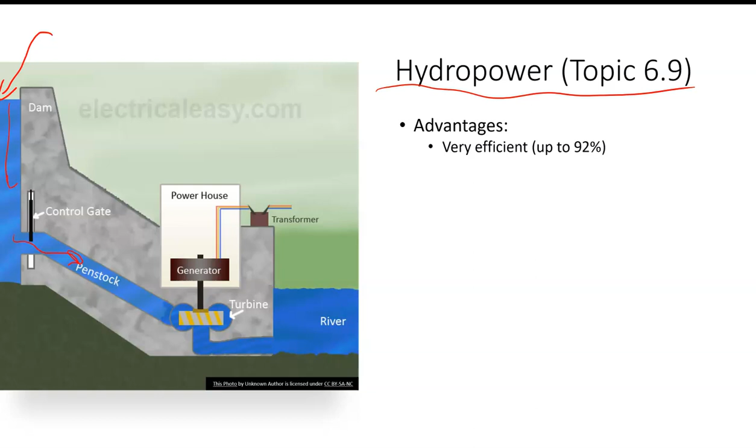Now, we also have that 24/7 capacity. So unlike solar and wind, which are intermittent sources, hydropower can be used at any time of day, regardless of the weather. Now, it is, of course, somewhat limited by the water cycle. So that reservoir has to remain full, and the only way that happens is for water to return upstream. Now, there is essentially no air pollution or CO2 emissions from the process that creates electricity. Of course, concrete emits CO2; the production, the construction, all those things do have carbon footprints associated with them, but the actual water turbine generator does not produce any air pollution or CO2.

And also, unlike maybe a nuclear plant or a thermal plant, which takes upwards of 20 to 30 minutes to get hot enough to produce electricity, dams are almost instantaneous. So you can kind of think of it as a giant low-tech battery, there when you need it.

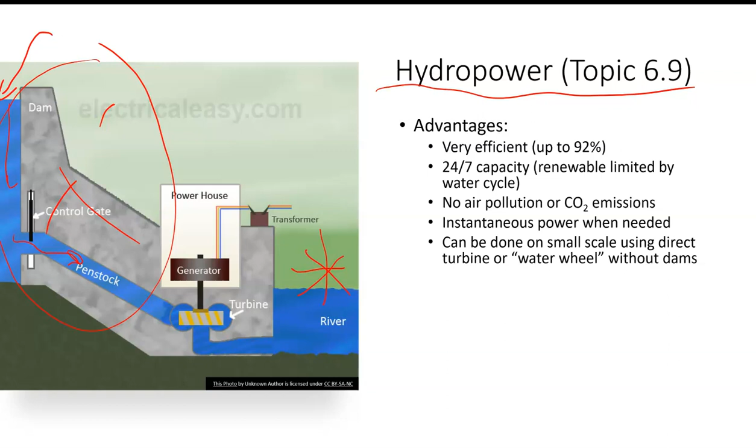And we don't really do this frequently yet, but we can also do hydropower in small scale. So maybe we don't construct a giant dam, and all we do is we take moving water, in this old water wheel concept, that has enough energy to generate electricity. Or maybe you just bypass the river and move water through sort of an artificial channel for electricity. There's all kinds of other ideas for smaller scale. Now that would not produce nearly as much power per generator as a giant dam would, but this can be done without having some of these disadvantages.

The primary disadvantage being, of course, that it's expensive to build dams, and probably the single biggest controversy around dams is the fact that they have a major disruption on the river habitat. Makes it really difficult for migrating fish, for example, to do their thing, so that it impacts their population. So there are some disadvantages that are not air pollution or climate change related that make dams really unpopular in certain parts of the world. And of course, areas that don't have rivers can't use hydropower in this sense.

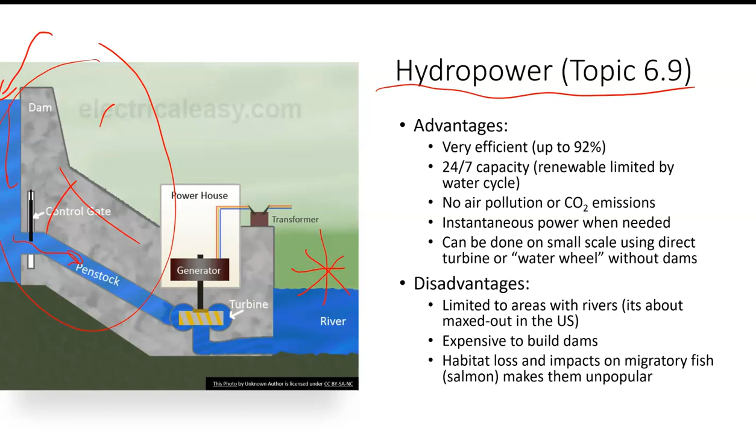Now, moving on, we can look at tides, right? So hydropower is just simply the idea of using water to power things, right? So tides are very reliable, right? There's a predictable cycle of water moving in, water moving out based on the gravitational pull from both the sun and the moon, right? Very predictable.

And so there's all kinds of ideas out there for taking this predictable pattern in our oceans and inlets and sounds and stuff like that, and using that moving water with the tides to spin turbines. So you can almost think of them as an underwater wind turbine concept, but rather than wind blowing the turbine, it's water. There's several different concepts out there.

One of them involves using waves. So basically, you have a buoy type structure anchored to the ocean floor, right? The ongoing up and down of waves could theoretically spin or move an object within a generator to create an electrical field, right? So these are out there. They actually do work. The prototypes do produce electricity.

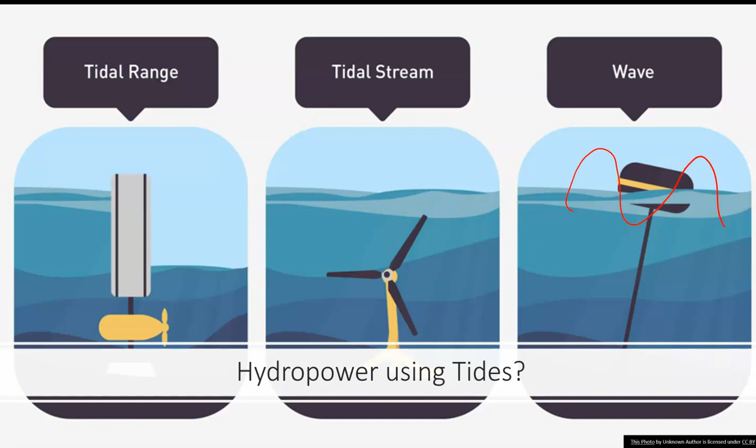But again, ocean water can be corrosive. How does this impact underwater habitats and so on? Those are ongoing studies. This probably will be something that scales up eventually, but it is something we can use hydropower for. All right, next topic,

6.10, geothermal energy. As the name implies, geo being earth, thermal being heat. We're going to take heat from within the earth and access that heat to generate things like electricity or heat water in homes. So basic idea, you have underground water, right? So we have superheated water that's in close contact to some sort of geothermal heat source, maybe a magma plume or something like that, right? We can drill into that super hot water.

Now, hot water is pumped to the surface. Now, that water is under intense pressure under the surface. And so it's actually much, much hotter than just boiling water like we would have at the surface. So as that superheated water works its way to the surface, that pressure is relieved and it just creates steam, right? So then here we have our very familiar high pressure steam turbine system, all right?

So the difference here is rather than at the surface burning coal or natural gas, or using a nuclear reactor to boil water to create steam and spin the steam turbine, we're taking already heated water that's been heated by the interior of the earth, right? And once that reaches the surface and that pressure is relieved, that turns into steam. That steam spins the turbine, generator, and off we go, right?

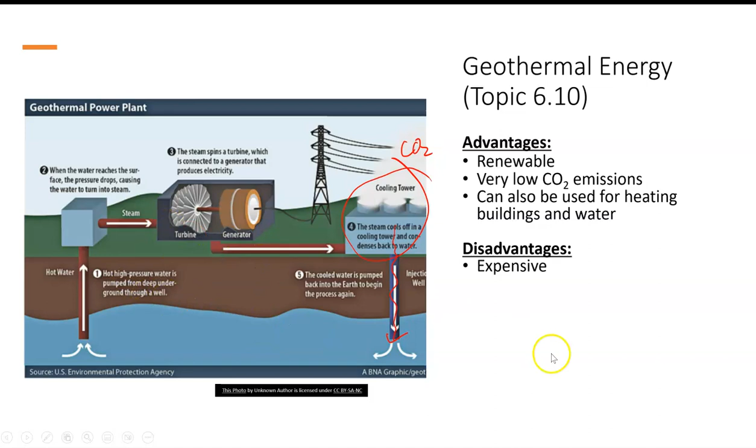All right. Now, disadvantages, it's expensive, right? We're digging deep underground. And sometimes the steam is a little corrosive. So it's an expensive process. And of course, not everywhere has enough geothermal heat near the surface to make this even remotely practical.

So even where it is near the surface it's expensive. If we have to dig down super far, it's just not practical on the financial scale. Okay, so it's really only practical in certain areas, Iceland being right on top of a divergent boundary, of course, being one of those places. All right. Now, there is also some air pollution.

If you've ever been around hot springs or in volcanic areas, there's that characteristic rotten egg smell, right? What you're getting from that is probably hydrogen sulfide. That is actually a somewhat toxic gas, and it could lead to acid rain anytime we're putting sulfur and stuff like that in the air. Now, you're not at dangerous levels near hot springs, mind you, but you are getting whiffs of that.

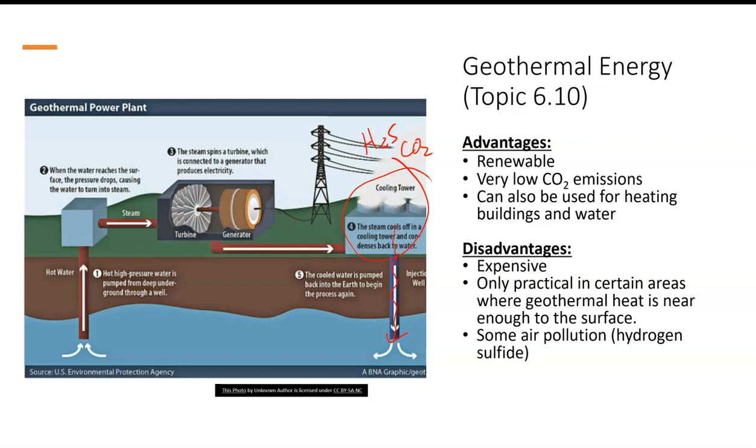So we do get a little bit of hydrogen sulfide emitted as well. So it's not completely without air pollution. There's some, but compared to our fossil fuel resources, it's a minor fraction. All right, hydrogen power, last topic.

Hydrogen is the single most abundant element in the universe, super abundant on planet Earth. Except free hydrogen, just hydrogen gas, is actually really rare because it's so reactive. It doesn't stay by itself. It reacts with things and combines, usually into water. So most of the hydrogen is locked up in the water. Good news is we have so much water, and it's a renewable process. We use water to get the hydrogen, but after we've used the hydrogen, we make that same water again. So we're not going to run out of water by extracting hydrogen from it.

Now, once that hydrogen has been extracted, it would typically be stored in a tank, just like natural gas or propane would. And then that hydrogen gas can be used for all sorts of purposes. It can help make nitrogen-based fertilizers for agriculture. It can be used as a flammable gas, although that's an unattractive way to use hydrogen, and we'll get to why in just a minute. It can power large and smaller vehicles, an alternative to the traditional battery electric vehicle that seems to be winning in the markets right now. Or it can be used to generate electricity, probably through fuel cell technology.

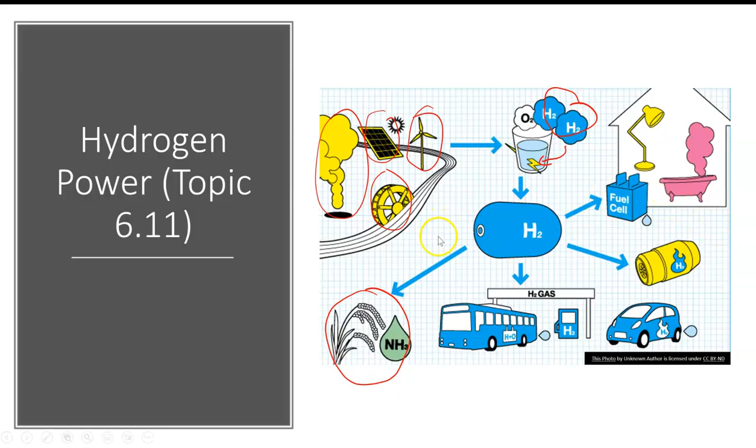So now, the ways in which we use hydrogen. It could theoretically just be burned. When we burn natural gas and methane and propane, it creates this nice, pretty clean blue flame. Hydrogen is also exceptionally clean, but considerably more volatile in the burning process. It burns much faster and hotter and a little bit more explosively. So the idea of burning hydrogen, particularly in automobiles, is sort of unattractive for that reason. It's not that you couldn't power a vehicle by burning hydrogen. It's just that we add a little additional risk to the process.

So more likely than not, if we go down the hydrogen fuel highway, we will utilize fuel cells. Fuel cells are a technology, and it's pretty cool in that we input hydrogen and oxygen. If you burn hydrogen in the atmosphere, it will react with oxygen to make water. But rather than combusting those, we create an electric current by putting the hydrogen and oxygen into this fuel cell.

So what we essentially do is create an electric vehicle, but rather than running off traditional lithium-ion batteries like most electric vehicles do today, this would operate off of pumping hydrogen and oxygen into a fuel cell to create that electric current. But then it's still an electric motor, and there's probably still going to be some battery backup in there.

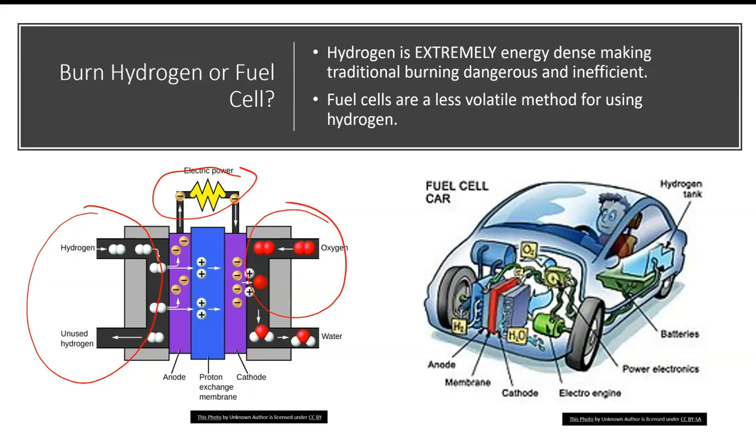Okay, so hydrogen fuel cell cars are in fact electric cars, all right? But rather than like lithium-ion batteries, they use hydrogen fuel, oxygen from the atmosphere, and then fuel cells to create the electric current rather than batteries directly to an electric motor. Okay? So it's a pretty cool technology. But just like all of our sources, we have both advantages and disadvantages.

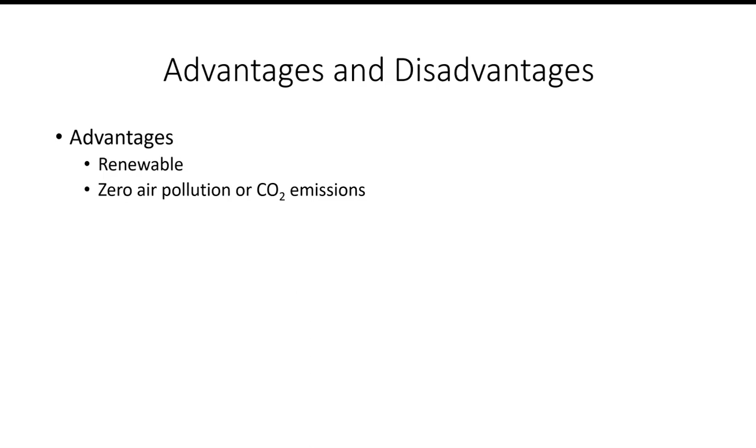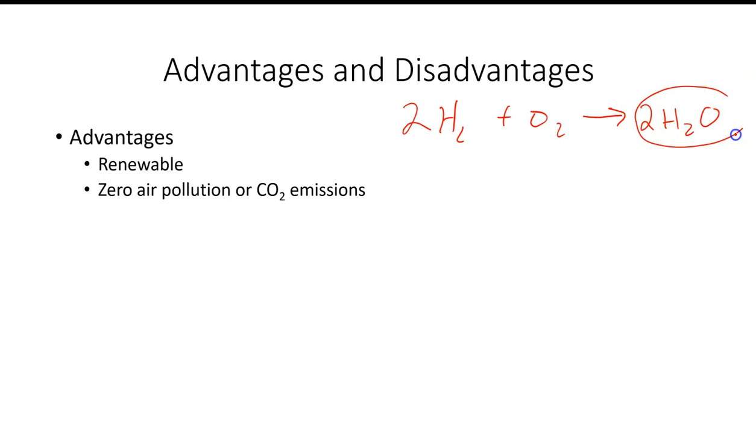All right? So hydrogen is renewable, right? We get it from water, and when we use it, we just create more water. So we have a closed loop there in terms of where the hydrogen comes from. All right? Zero air pollution, okay, or CO2 emissions. So when we burn hydrogen and oxygen, for example, or if we run it through a fuel cell, all we produce is pure water. It's beautiful. All right. It's 24/7.

So we talked about this in class, but again, I showed you guys in the initial diagram how we can use things like wind and solar or hydro or geothermal to create hydrogen or to extract hydrogen from water, right? Now, this is a way to store surplus solar and wind, right? So it's not that there's not enough solar and wind. You're going to hear me keep saying this, right? It's just that it's not always available where the turbines are or where the photovoltaic panels are, right? But we can produce surplus power when the wind is blowing and when the sun is shining. That surplus power theoretically could just, it doesn't get used, right?

What we can do is when we have surplus, we split hydrogen off of oxygen from our water supply. Then we have hydrogen, which is essentially a way of storing that surplus power from solar and wind. All right. And then what's also attractive about that is big solar farms, which are required to produce very much power, and big wind turbines. Those are not portable. So they're only attractive for the idea of electricity generation, etc. Hydrogen is a portable power, getting us many of the advantages that natural gas has.

All right. Now, disadvantages. What's the hang up? Why aren't we doing this? Just all we do is use water. It's renewable, right? We can store it. Here's a hang up. It's a negative net energy. And I believe at the beginning of this unit, I said if something does not produce more energy than we put into it, it's sort of not a good energy source. All right. So that seems like it would maybe make hydrogen an automatic non-starter.

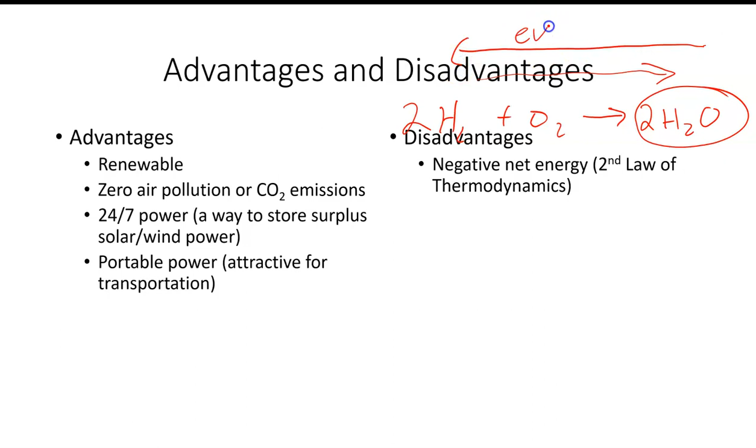All right. So essentially, this process puts energy out, but to go from water to hydrogen and oxygen, we have to go energy in. Right? And if we're doing that process, the second law of thermodynamics tells us the energy in to the water, some of that is going to get lost, right, as heat in the process, right? Not to mention the fact that that's an endothermic process. Okay, but even after we burn the hydrogen, you get a lot of that energy back. There's some net loss. So we have negative net energy. So why would this be a non-starter?

The reason is this, right? We have surplus clean energy at certain times of day during certain weather. All right. A lot of that energy we are not utilizing because it's surplus. We don't have any good way to store it. And so we can think of that as lost energy. Okay. So if we use that surplus, even though this is a negative net energy process, the lost energy here, at least some of it and much of it, is not lost because we can at least create hydrogen from it or extract hydrogen by utilizing that source.

So we have lost energy here that gets used for nothing. We have some lost energy here, but at least some of it is stored in that hydrogen we extract from water. Okay, that's why even though it's a negative net energy process, it might still have some use for society. Plus, it helps with that intermittency issue.

All right. Now, like many of our emerging technologies, right, fossil fuels are dirt cheap, right, comparatively. It would not be expensive, by the way, to burn hydrogen. It is expensive, however, to make fuel cells. So to use hydrogen safely, right, and effectively, fuel cells contain platinum as a catalyst. All right, and as we all know, platinum is an expensive metal. Okay, so hydrogen does have some definite advantages, things that make it attractive. Those disadvantages are a hurdle, right? But we'll see where we land.